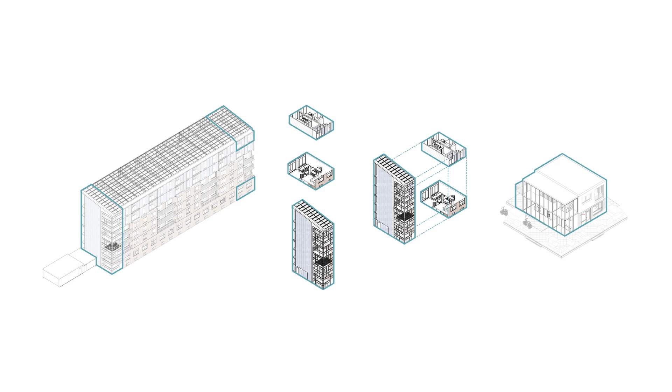These interventions allow us to design for the existing social environment. The design stimulates and fosters the existing social community, establishing symbiotic relationships between the local environment, current and new residents. By doing so, we aim to create both social and energy-positive buildings. The ground floor, circulation core, and the top-up will be captured and built as part of our one-to-one prototype.

You may be thinking, why are we building the prototype? Annemiek will tell you more about it.

SUM is a student-led team from Delft University of Technology competing in the Solar Decathlon Europe 2021, a worldwide competition for university teams. The Solar Decathlon is based on 10 contests, ranging from construction and engineering to affordability and viability, but also innovation and communication, education and social awareness. The aim is to develop innovative solutions addressing the technical, architectural, and social challenges that today's cities face.

More and more people are living in urban areas, increasing the demand for living spaces and resources. That is why the focus of the competition is to find a solution to modernize the existing building stock as well as design the urban surroundings.

The competition consists of two parts: the theoretical design and the practical prototype. For the theoretical part, we chose a case study in The Hague to renovate and transform a building based on our principles. For the competition itself, taking place in Wuppertal, Germany, in May-June 2022, we are required to build a one-to-one representation of our building design as our prototype. This prototype puts SUM's ideas for sustainable architecture into practice on a smaller scale.

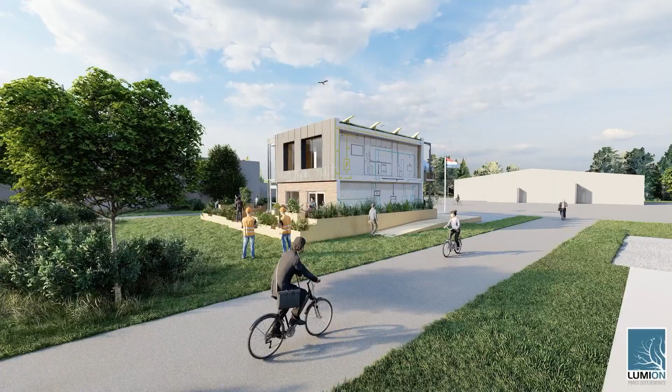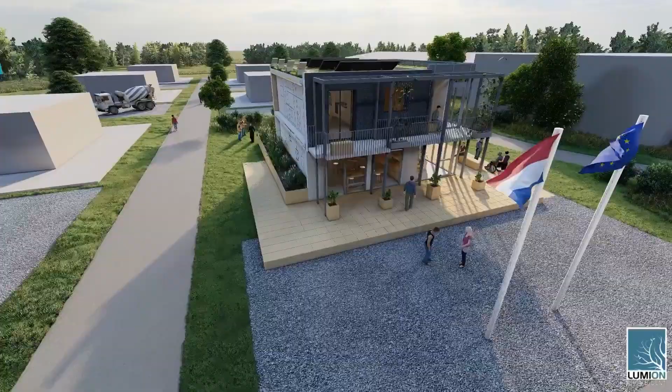On one side of the prototype, you will experience a new street redevelopment showing how we could transform a traditional Dutch street into a more lively, shared, and safe space for both cyclists and pedestrians. With well-defined meeting points and public functions at the ground floor, this deck and living street will serve as the main entrance to our prototype.

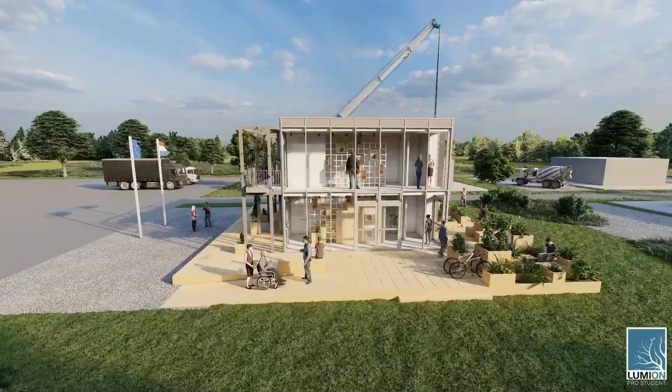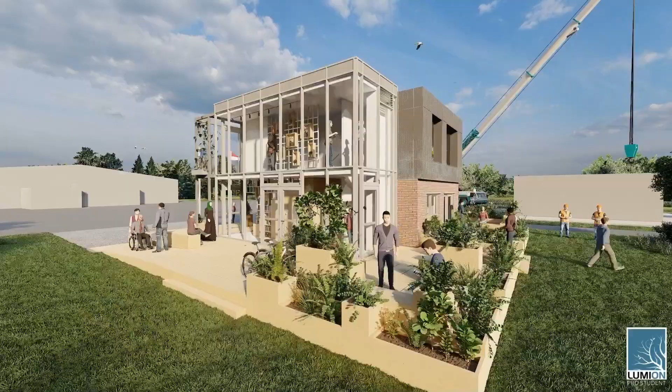The second deck will simulate the courtyard side of the case study building in The Hague. Here you will immerse yourself in Mother Nature with your friends, family, and neighbors. Situated on the southern side of the prototype, the courtyard deck will allow ample recreation space for you to sit back, relax, and take in all that the prototype has to offer.

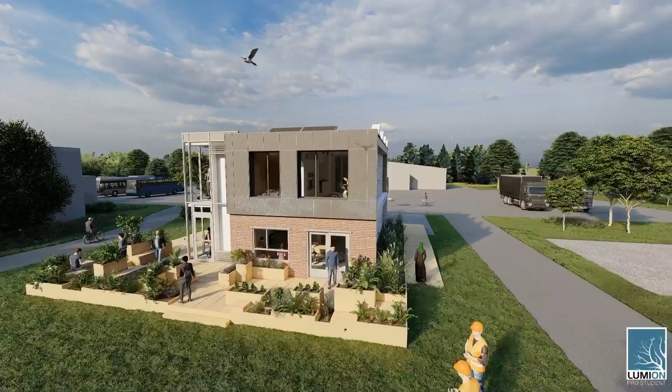The courtyard deck will be furnished with our own urban modular elements. These would function as seating, planters, bicycle storage, and much more. This would be made accessible for residents to assemble themselves and take ownership of what would otherwise be a collective courtyard of the case study building. All in all, the prototype site would be a sensory and engaging environment, and we hope to welcome you soon.

The structure of our prototype follows our core values of modularity and prefabrication, using either recycled or bio-based materials. For the wooden structure of the ground floor, we are using 2D LVL prefabricated elements, while for the top-up, we decided to use 3D elements.

We are using laminated veneer lumber since it can achieve high strength while at the same time being lightweight. Aside from this, the circulation core is made out of a structural facade using steel profiles. In general, the prototype is a hybrid structure, which is lightweight and environmentally friendly. Thanks to the dry connection, the building will be easy to assemble and disassemble, allowing us to build the prototype in only 2 weeks.

The envelope design of the prototype is made out of 3 parts, which represent the different layers of time. The ground floor of the prototype stands for the tenement flat. In order to respect the building's identity, key characteristics such as the window openings and the warm appearance of the brick facade are kept.

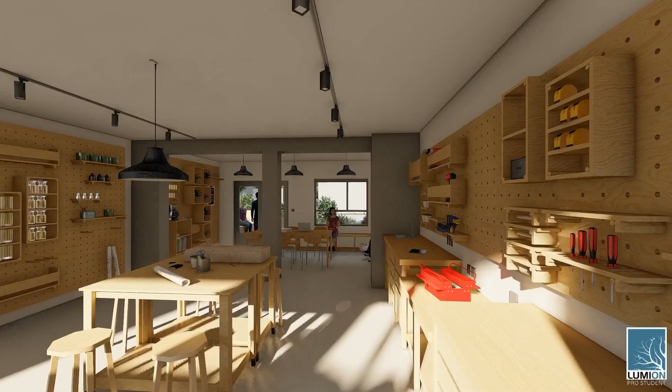The interior vision follows our core values of modularity, customizability, and inclusivity. The ground floor of the building design restores, with respect to the heritage, its original function as a public and commercial plinth.

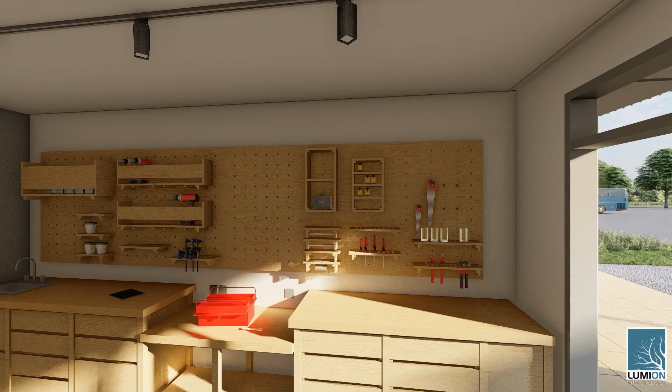In the prototype, it houses a community workshop that will promote social interaction through making and craft, as well as an additional social space which can transform into a community cafe. Both zones are connected by a timber peg wall system, which acts as a tool library, a second-hand shop, furniture storage, and a notice board for the neighborhood.

During our time in The Hague and Wuppertal, this will definitely be the place to be.

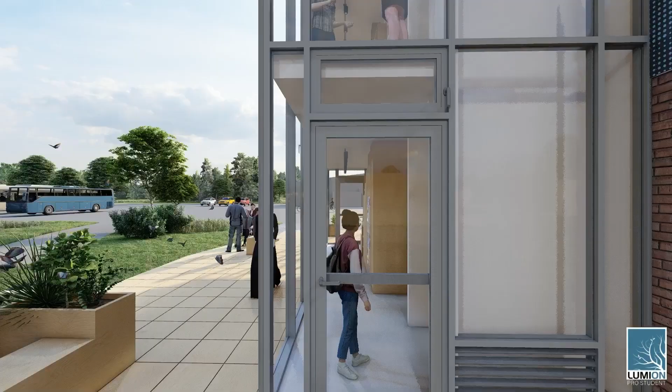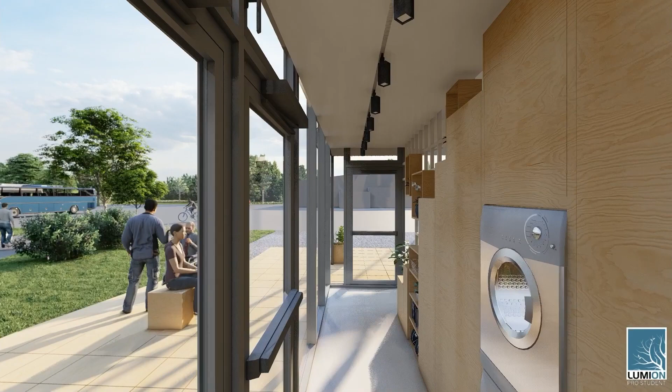The circulation core will provide a north-to-south connection, as well as a vertical connection with an elevator and a staircase. The core interior design is organized within one furniture piece, which forms the staircase up to the first floor.

This element houses functions such as mailboxes, a laundry and drying machine, waste management, a bicycle repair station, and a book sharing library.

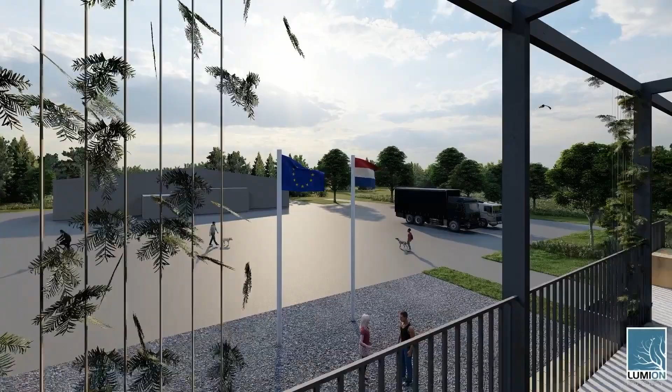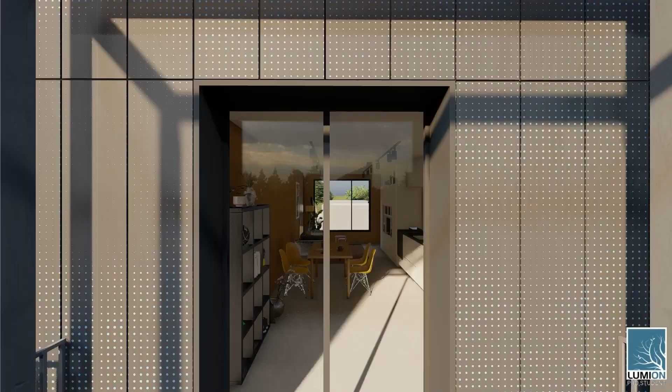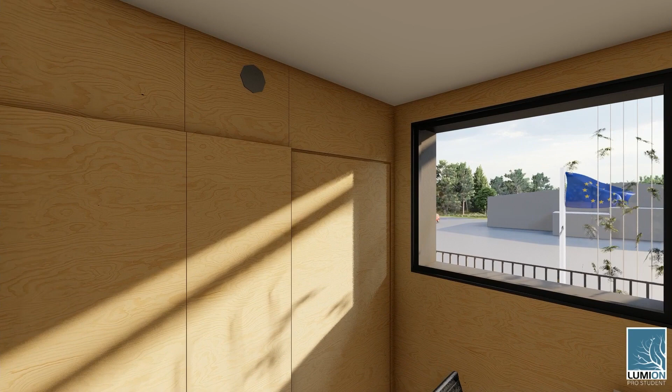In the top-up housing unit, the modularity of the structure is also reflected in the interior layout. The unit consists of two modules: one smart module with all the necessary appliances and built-in furniture, and one much more open and flexible module which residents can really make their own.

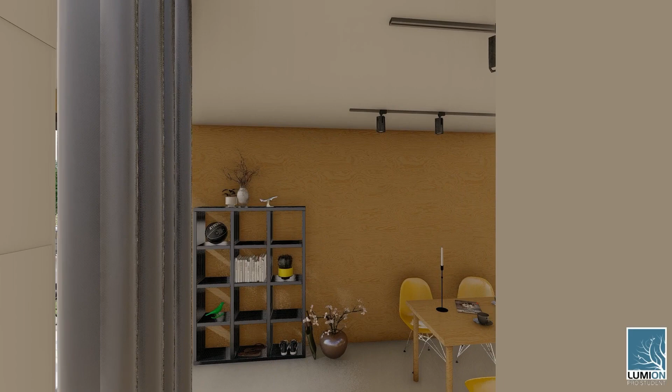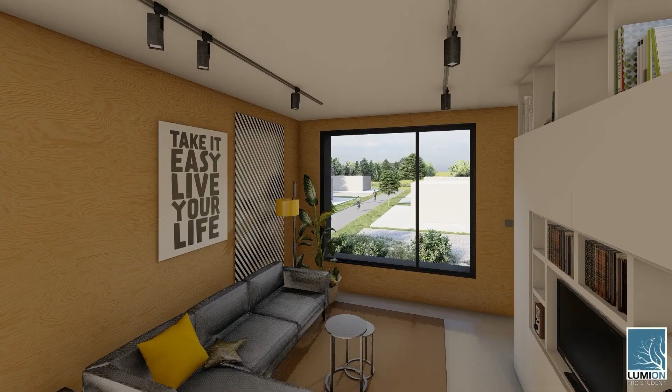Our movable feature wall is made of various furniture modules with different functions, which can be customized, demounted, and reused. This is following the product-as-a-service principle. This feature wall system allows for maximized functionality of a space in different living scenarios such as sleeping, working, or entertaining.

The openings in the facade create an interaction between inside and outside, up to the point where the living space can basically extend onto the gallery.

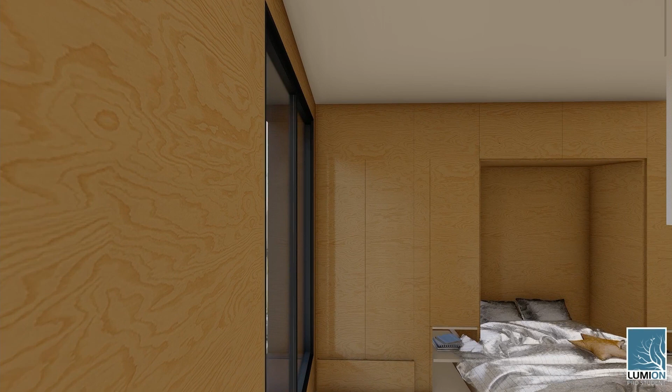These same windows also provide the unit with plenty of natural light. The use of color customizable LEDs provides the possibility to change the atmosphere depending on the situation, while also maintaining a low energy consumption. This is perfect for all the different living scenarios that we envision in the housing unit.

Now, Arne will tell you more about all the systems that create a comfortable atmosphere in the SUM prototype.

The prototype includes a wide range of innovative climate systems in order to create a comfortable indoor environment. These systems follow our concept of symbiosis, in which the different elements create mutually beneficial relationships with each other. Our modular systems room is placed inside the circulation core and will become the beating heart of our prototype. These climate systems are designed according to the reduce, reuse, and produce strategy.

We start with reducing the energy demand by insulating our prototype in order to achieve the passive house standard. Then, we reuse as much energy as possible with our ventilation and plumbing system. As a last step, we produce the rest of the required energy in a sustainable way, with the sun as an energy source.

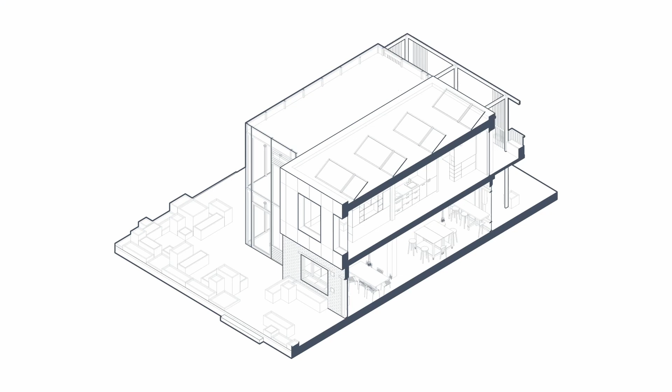During the summer, we use passive methods to cool down our prototype. Firstly, we keep out most of the solar heat with our smart integrated shading system. Next to this, we use the cooling effect of plants in order to reduce the inside temperature. As a last measure, we use nighttime cross-ventilation in order to cool down our prototype during the nights.

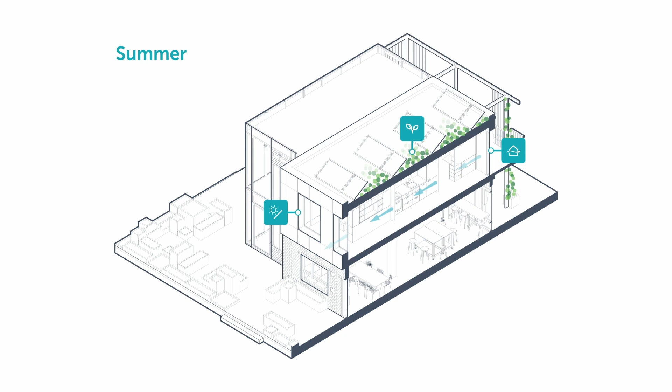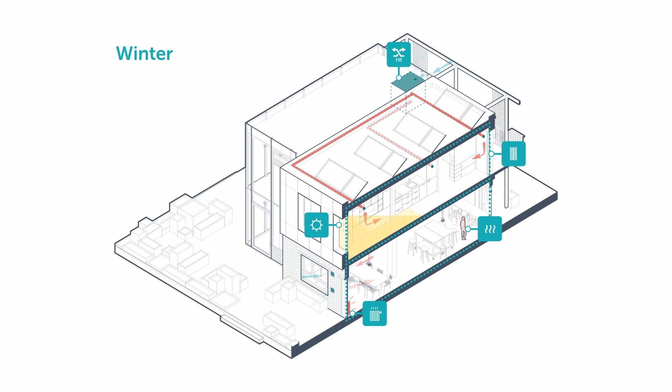In the cold winter months, we fully utilize the solar heat gains and the internal heat generated by people and appliances. This heat is contained inside our prototype with our thick layer of insulation. Next to this, we rely on our very efficient ventilation system with heat recovery to keep the prototype at a comfortable temperature.

The top-up apartment functions as an energy producer for the whole prototype. The PV panels on the roof and the building-integrated PV panels on the facade produce the electricity. Hot water is produced by an air-to-water heat pump, which uses the hot air from our innovative but low-tech solar chimney in the circulation core.

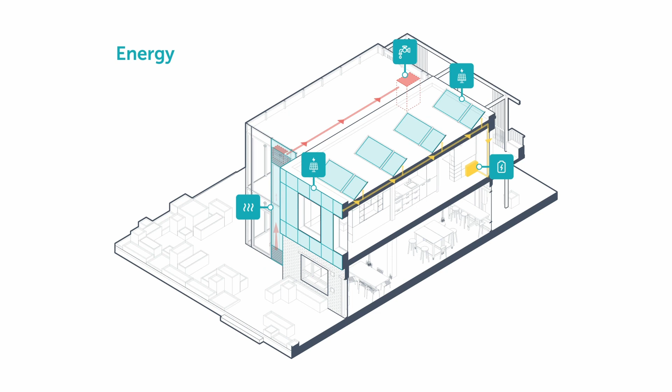In order to reduce the amount of fresh water our prototype needs, we reuse the rainwater and the grey water. The grey water, which is water from your sinks and from your showers, is filtered using a helophyte plant filter on our site. This filtered grey water and the rainwater are used to irrigate the plants.

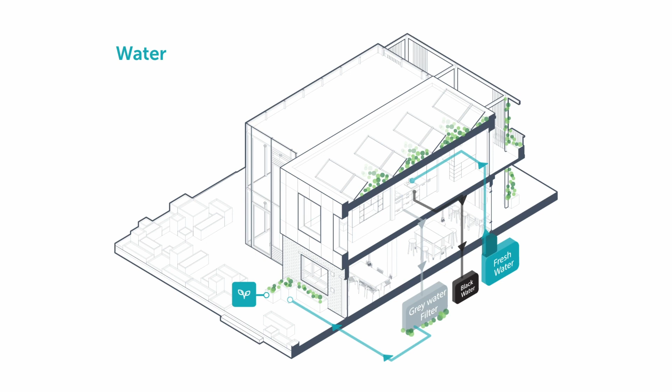These plants play a key role in increasing the biodiversity and reducing the urban heat island effect. Next to this, they help to cool down our prototype during the summer. In this way, we create a symbiotic living environment for all.

Next to our building interventions, we are also developing a digital living platform that complements our design and encourages sustainable habits amongst the residents. Some examples of these sustainable habits are the sharing and repairing of second-hand products, growing and cooking of local plant-based food, and helping each other out when needed.

Inside of the home, the platform will give every resident a comprehensive understanding of their household's monthly energy consumption and waste production. Along with this, the platform also helps residents from different cultural backgrounds to connect and learn more of these sustainable habits together, creating social sustainability through symbiotic relations.

This is what our prototype will look like: a unit consisting of 2 stories, which brings our vision to life. In the summer of 2021, we will start the construction of our prototype, and once finished, you will be able to visit it in The Hague.

Afterwards, we will disassemble our prototype to be taken to the Solar Decathlon Europe competition in Wuppertal. There, we will reassemble it and it will be tested.